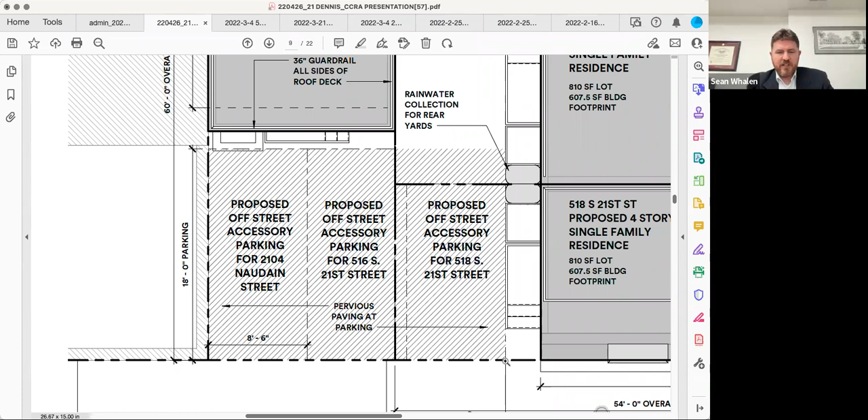So again, if this had been planned as a planned unit development, sort of a condo of the land if you would, all of these parking refusals would go away, but it was decided that we would keep these individual properties as separate, and that this parking will be addressed and set forth in a parking easement across the three properties to be recorded against the properties at that time. So with that, I would turn it over to Lauren, and you can tell me where you want to start.

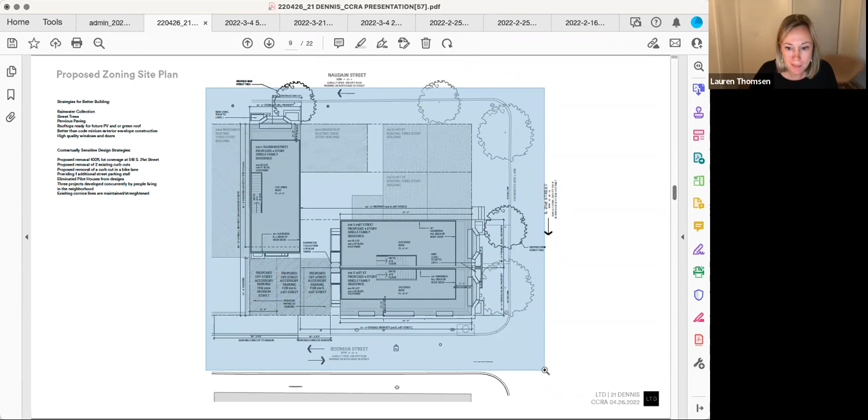I think here's a good place to start. So you can see we have 3 single-family residences. Sean, could you zoom in just a tad? That would be very helpful. They are all 3 proposed 4-story single-family residences with occupied roof decks.

And we are not seeking a variance for lot coverage, and our variance for height is minimal, considering what the by-right limit for RSA 5 is at 38 feet. We are doing a number of strategies to develop in a contextually sensitive way, which are evident on the site plan, and some of which Sean has mentioned before.

The first is we're removing the 100% lot coverage at 518 to the south, and we're proposing to replace that with a building that is equivalent of a by-right lot coverage, and taking a parking space, proposing a parking space for that. The parking we're proposing is pervious paving, and that would mean it would have less of an impact than regular paving on stormwater, and be better for stormwater management in that sense.

At 516, we have an existing curb cut that we propose to remove. This existing curb cut is going across a bike lane, which is obviously dangerous. And we propose to replace that with a new residence that will have off-street accessory parking in the rear between the off-street accessory parking for 2104 and the off-street accessory parking for 518 to the right.

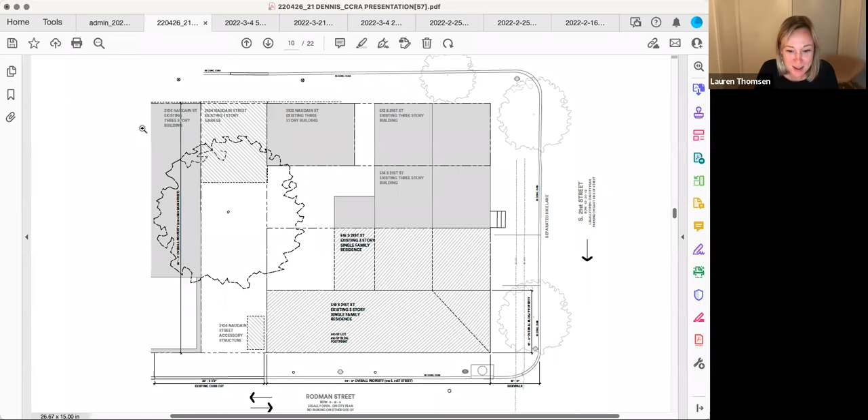And this is just an existing site plan showing the lot coverage.

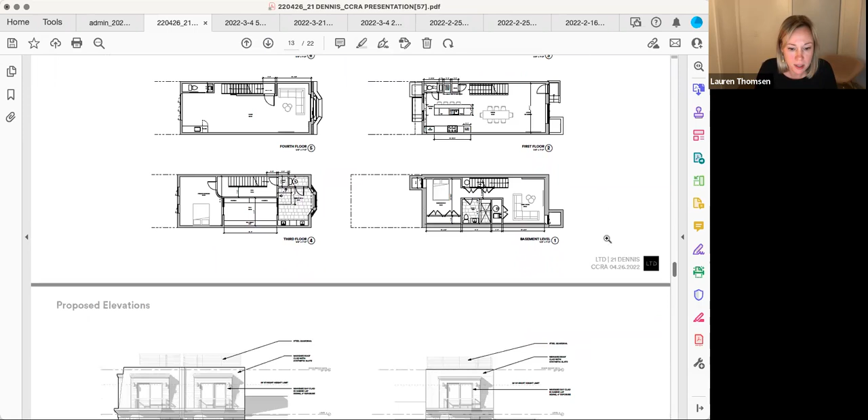Here are our floor plans, which are very similar for the 3 residences. Nuance changes at 516 and 518 were 15 feet wide, 41 feet deep, 41.6 deep. At 2104 were 16 feet wide and 41 feet 6 inches deep. Here we see the proposed building elevations.

We're proposing to use brick with a strong cornice, a bay window for added square footage because they are small lots. But we're not doing a square bay, we've angled the sides and clad the bays in brick. We're proposing simulated divided light mullions and casement and/or double hung windows with Hardie above the mansard.

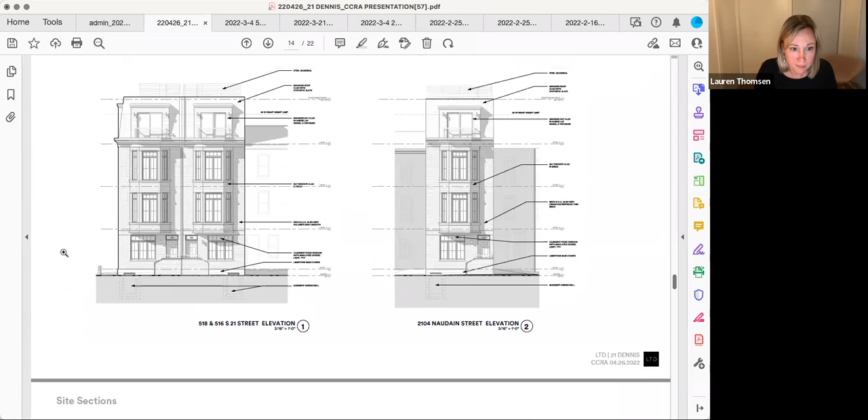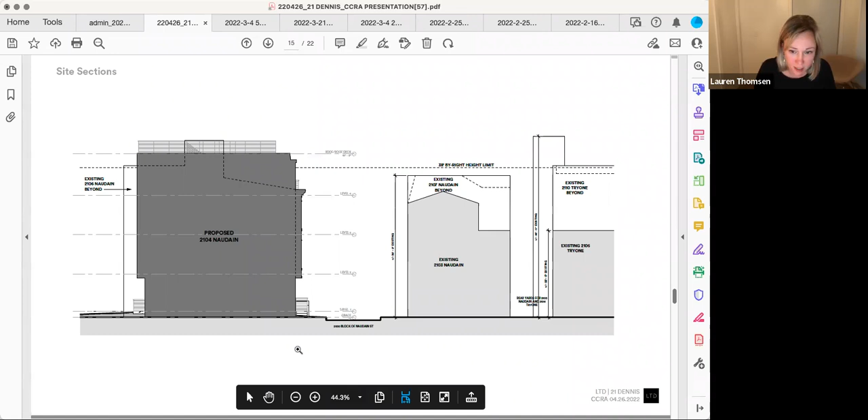We're showing site sections to demonstrate the impact of the height on the neighbors, and also the height as it relates to the existing context. Naudain Street has a number of buildings which are different in cornice line. So I'd say there isn't a strong cornice line on Naudain Street at this time, which we are highlighting on both the south and the north sides of the blocks. Next slide.

Cutting through 21st Street, we can see that there are buildings that are tall in the immediate adjacent context, which is 511 South 21st, kitty corner to the site to the north.

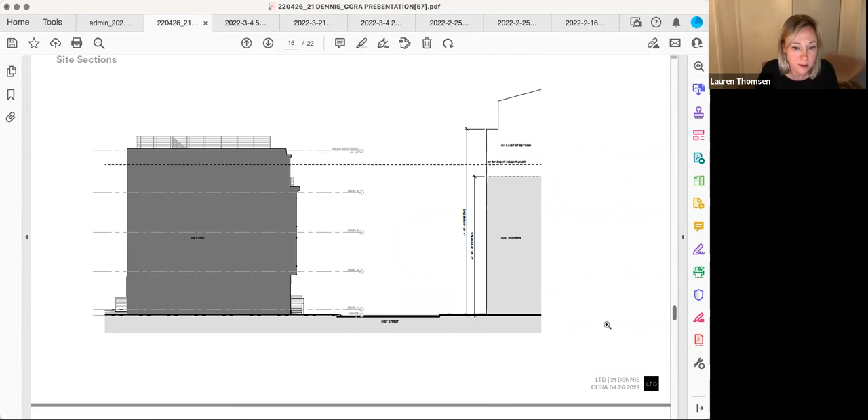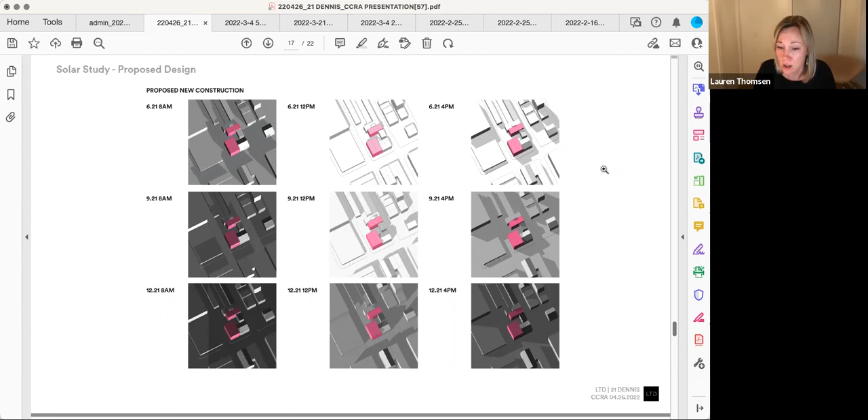We've done a solar study of the proposed new construction, so we can see the shadows that the buildings will cast at the summer solstice, the equinox, and also the winter solstice when you have the least light. So this is the proposed design at 8 a.m., 12 p.m., and 4 p.m. as the sun tracks around. South would be to the bottom left of all of the images. If you want to go to the next.

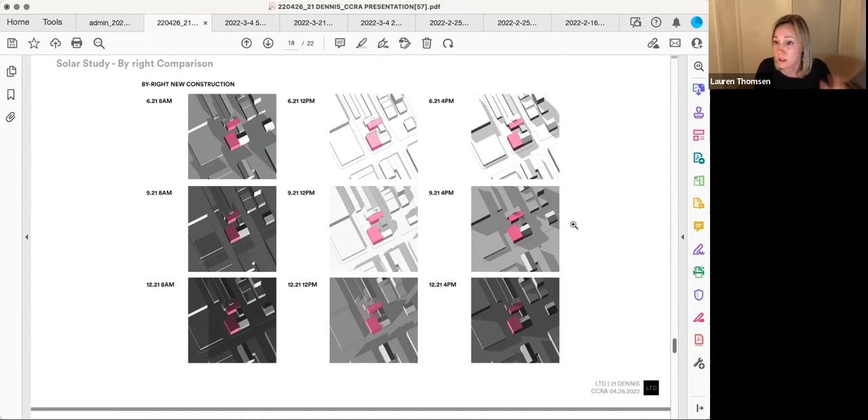We've also done a by-right comparison, as we're only 3.5 feet different, which in fact could be a solid guardrail or parapet. So what we're proposing is an open guardrail that won't effectively impact the light as much. Another strategy we're using is the removal of the pilot houses from these roof decks to eliminate that additional mass on the top of the buildings.

And then if you go one more slide down, Sean, here is a side-by-side comparison, and you can see that there's really very little effective difference in terms of the solar impact.

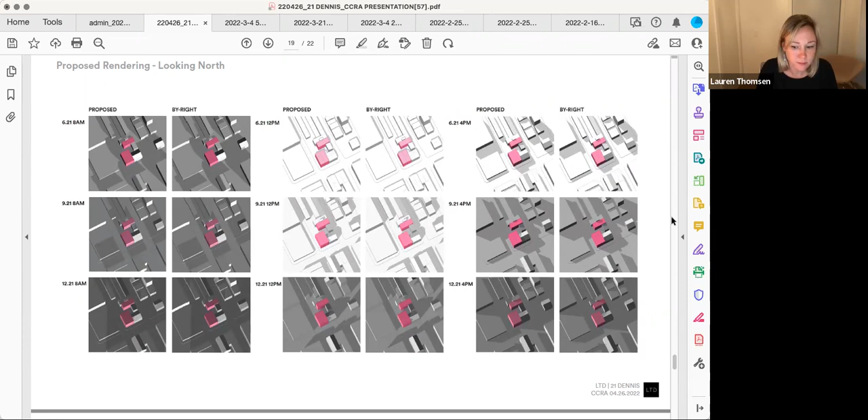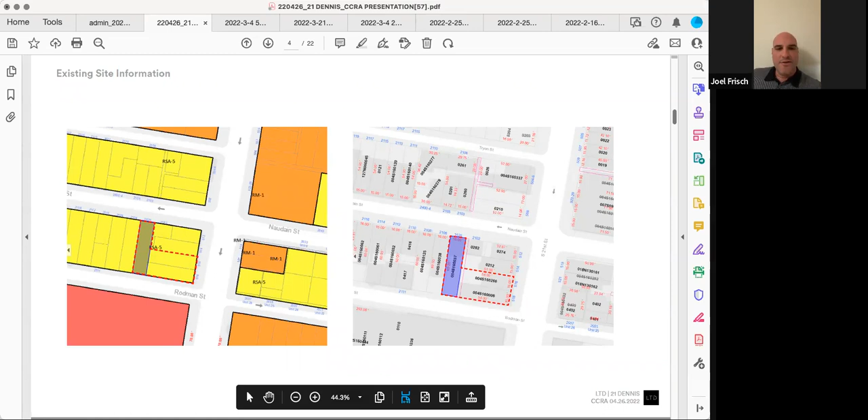Sure, good evening everyone. I'm Joel, live around the corner on Croskey Street. Super excited to be continuing to develop in our neighborhood. So in addition to sending out letters to everyone in the neighborhood, we certainly went around with our kids, who you see here on the Zoom, knocking on everyone's door. Had an opportunity to speak to a few of the neighbors. Always concerned with the unknown and what's to come with change. I think in general, many of the conversations have been supportive of continuing to improve the neighborhood. Certainly some questions around impact, but I know some of the neighbors are incredibly supportive. Some have expressed concerns about general construction in the neighborhood, and appreciate that there's a couple projects going on in the area. As local neighbors, we're willing to continue to hear any questions and needs of the neighbors and see how we can make this project work for everyone.

Terrific, all right, I have no further questions. Thank you. Okay, thank you, Bob.

Moving down our list, next Evan Litvin, any questions? Yeah, what material are you intending to use on the fourth floor, on the party walls, the exposed party walls? For the party walls, we were thinking it would probably be a cementitious panel, a lap siding. Okay, that's my only question.

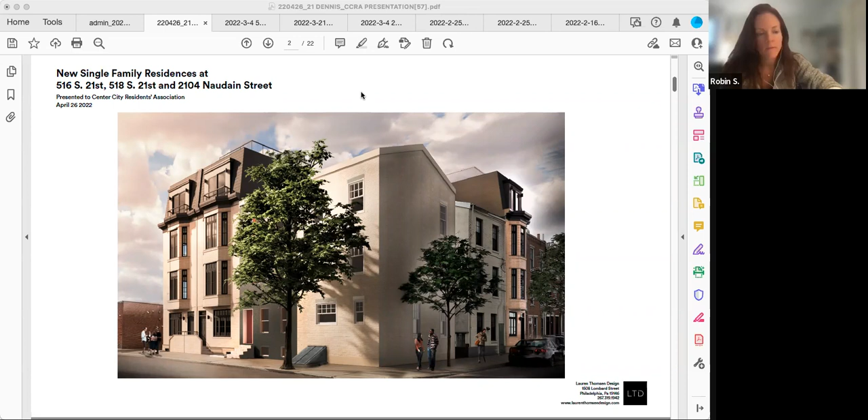Robin, any questions? No questions. All right, and Charles Robbins, any questions? My questions were addressed. I'd just like to state that I like the removal of the curb cuts off of 21st Street and Naudain.

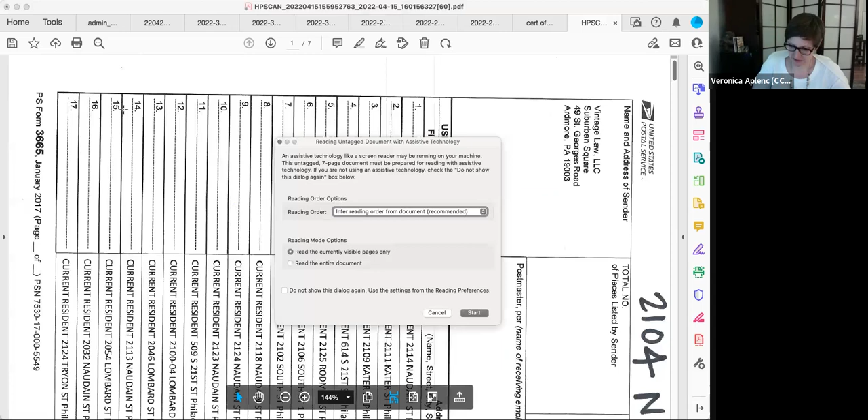Okay, and thank you. And I see that you're screen sharing the certified mailings that demonstrate that you actually put those in the mail. Yes.

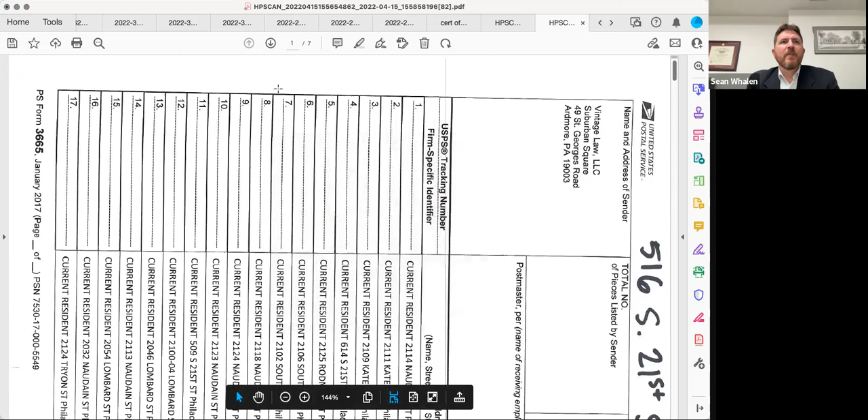So just to be clear, because we are presenting them together, I'm bringing up three since we have three separate properties here. What we did is we took the address list for each of the three properties, understanding that each property may touch a slightly different number of properties, and we combined them all together. That way you weren't getting one house that might get Naudain and 516 South 21st, but not 518 South 21st. So we sent all the materials for each of the three addresses to every address touched by any of the three properties. Okay, thank you, thanks for that clarification.

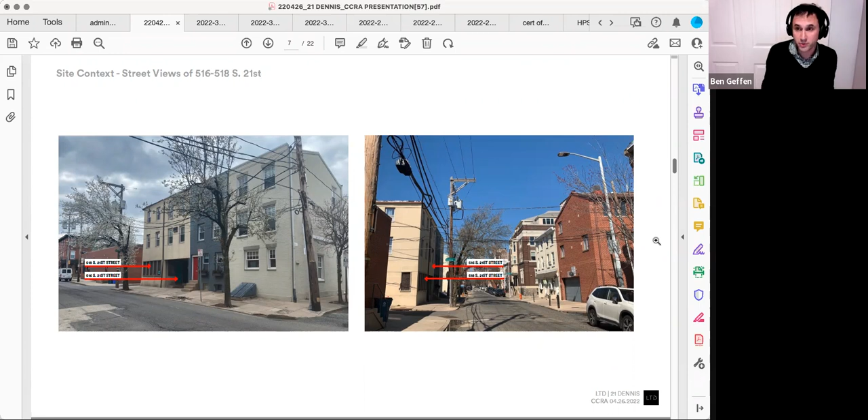We've routinely had problems when there is work being done in the near neighborhood. There's not a lot of on-street parking, and contractors just love parking their truck right in front of the garage door, which causes a lot of problems. It can cause backups of several cars, both coming out of the garage and coming down 21st Street attempting to get into the garage. So my question is, can you provide assurances that the contractor and the subs on site will be told not to leave their cars in front of the garage door? And if they do, who can people in the garage contact to make sure the truck is immediately moved?

Excellent points, and certainly something I should have raised already. First and foremost, both Joel and Rebecca and John Adler all live in the neighborhood, and they have a long-term relationship with the contractor, so there will be a lot of communication. They'll be walking immediately past this site every single day, at least once themselves, let alone multiple times, so they'll be immediately present.

And I will personally volunteer John Adler to share his information with everybody, to contact him directly if you don't get anybody, and you can always reach out to me. I just put my full contact information in the chat. I assume it hasn't gone away yet, and I will always reach out to the clients immediately.

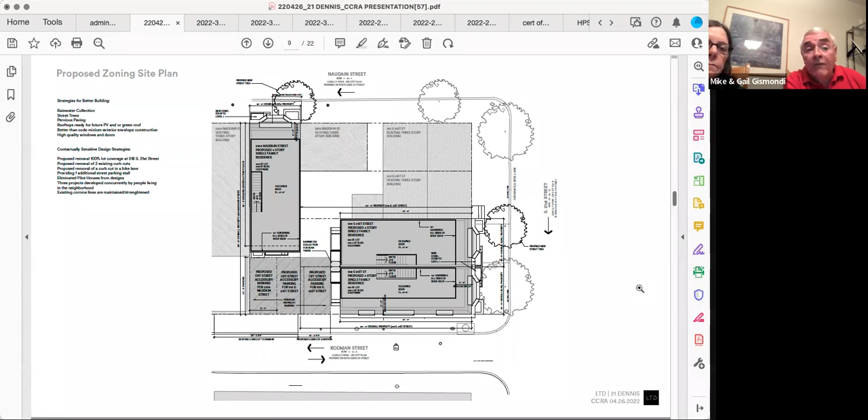Can you please unmute yourselves and pronounce your name for us, and also give us your address and share your thoughts? Mike and Gail Gismondi, 2106 Naudain Street. I'm delighted that they're finally going to build something at 2104 Naudain, but I want to follow up on the parking situation. I have off-street parking behind my house, which is adjacent to the lot at 2104. I'm in and out of my parking spot several times a day, a lot of those times are for medical appointments.

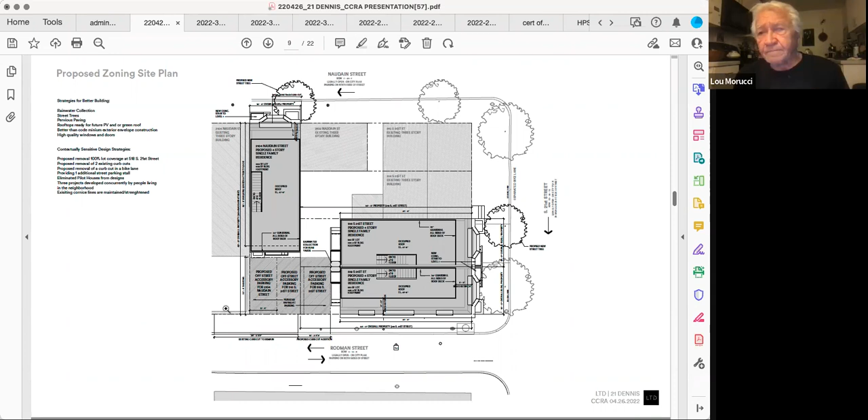I need space directly behind 2104, either to pull my car out or for room to back my car in. I'll go out 21st Street, I don't have a problem with that, but if I come back in, I need space here to be able to back into my parking spot. Either that, or I have to back down Rodman Street to get out of my parking spot.

So a couple of points, and again, certainly understood. We will never block off the rear of your parking. You will always have access.

It's not the rear of my parking. Anything on the sidewalk directly behind 2104, I can't get out and go east, and I don't have room to come in and back into my parking spot. That sidewalk has to be kept open if it's at all possible.

Right, and certainly understood, that's what I was going to say. We'll be keeping open this whole area to give you a turning radius. In the event there's a situation that needs to block this area for any reason, we don't foresee one, but we will reach out to you ahead of time to make sure it doesn't conflict with a necessary ingress or egress on your behalf.

All right, I have a number of questions. We were handed on 8.5 by 11 paper the plans, and quite frankly, I can't read them. I'm just curious, what is the depth of the property proposed for 2104, the actual building?

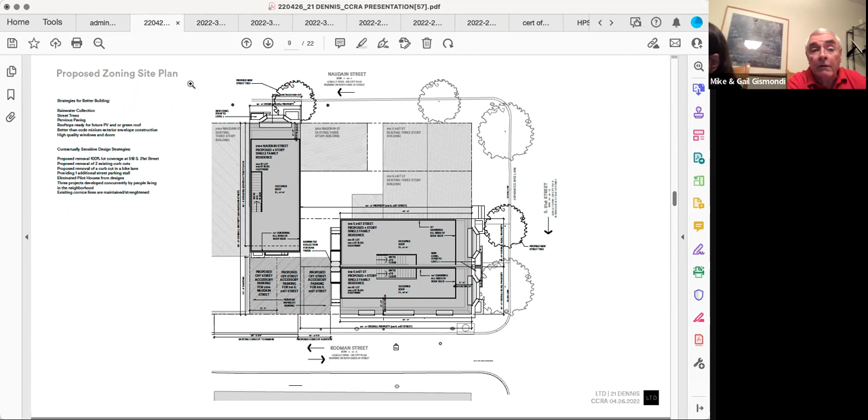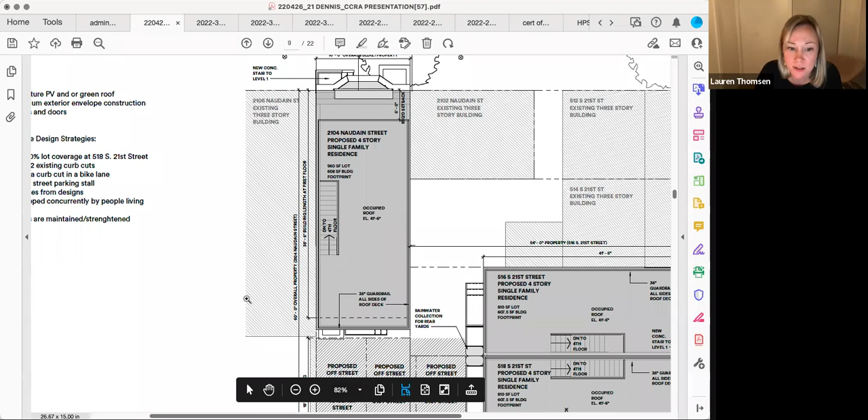It's 41 feet 6 inches. Okay, I don't think so, Lauren. I think that one's the small one, I think that one's 38.6. I think we went to 41.6 on the upper levels. Yep, you're right, correct. And then we went down to 38.6 at the ground, at first floor, which is the same as the other two buildings.

And Mr. Gismondi, if you see here, it is actually not proposed to be as deep as your existing home. Correct. Okay, no, I don't have a problem with it, it's a half a foot shorter than ours.

That's fine. And I do apologize if for any reason anybody on this call wants better plans and larger printout plans, I'm absolutely happy to provide them. It just gets unwieldy when we're sending out things in USPS mail. So if you want more full plans, please reach out to me directly and I'll make sure you get those.

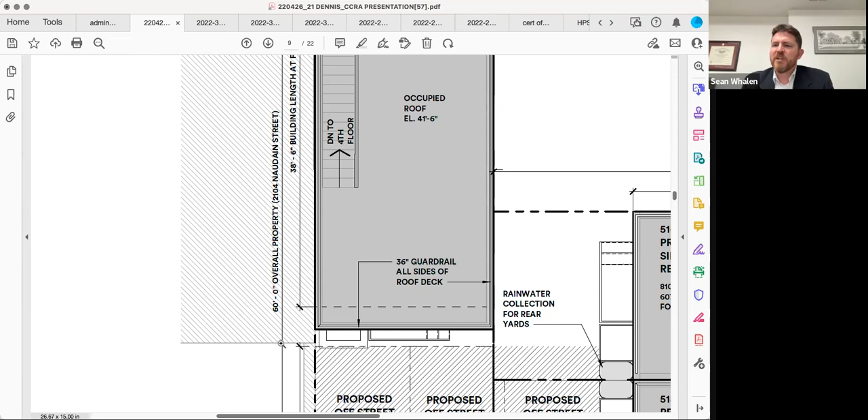Okay, and also on the plans, is there a window well for the basement in the front of the house and the back of the house?

Lauren, that's got to be you. Muted. At this time, we are showing that

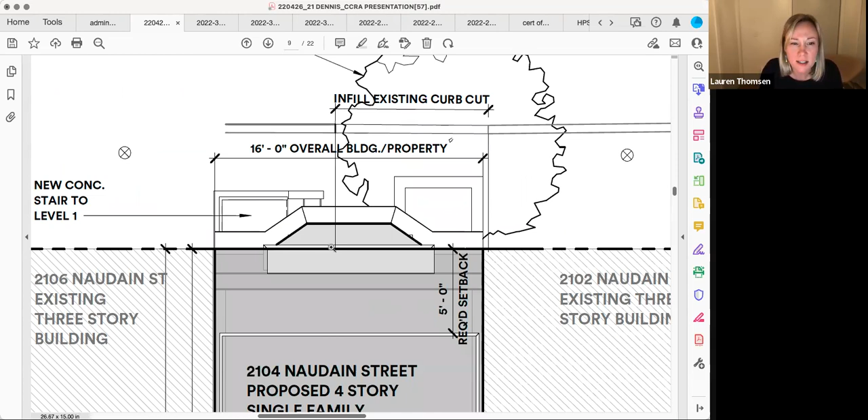Sean, do you mind flipping to the floor plans? Oh sure, that might show it more clearly. Maybe I could zoom out first so I don't kill everybody. Thanks, here we go, there we go.

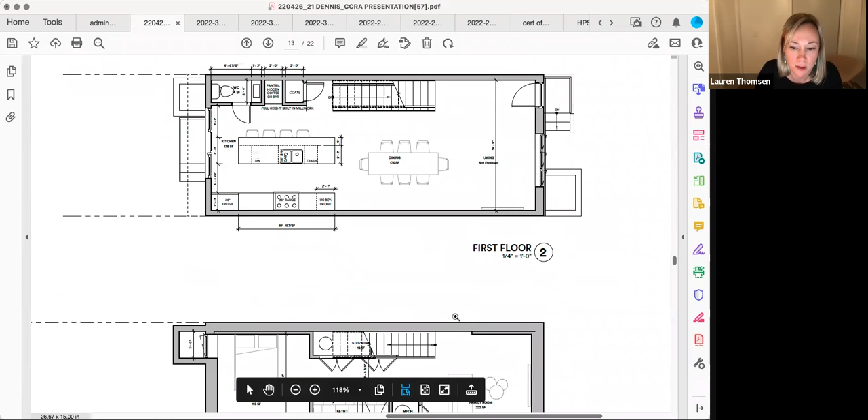You want to look at, we are showing two wells. We're required to have an egress well. Sean, if you don't mind, just scroll down and show the lower level, the basement level. So we're just showing two wells so that we can get two aspects of light into that level and really just make it usable.

Is that level entirely underground? Aside from 18 inches, yes. I'm sorry, what? Our first floor level, we are starting at 18 inches above grade. And so this basement level floor is 18 inches above grade and the remainder is below grade.

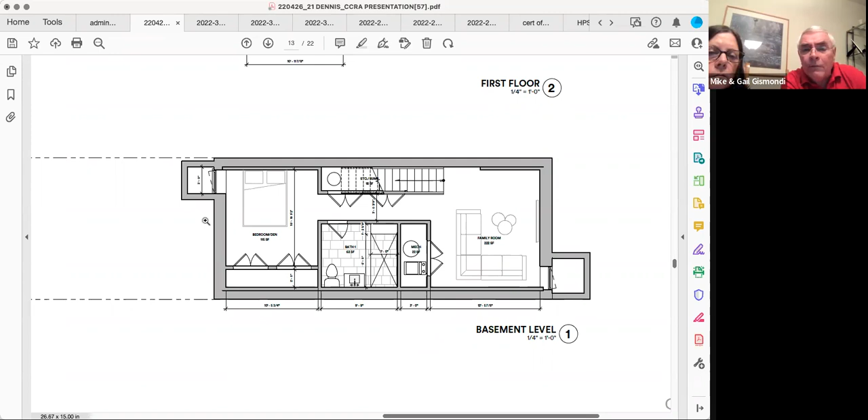Okay, so the renderings you have for the basement, it appears as though you're putting bedrooms down there? Or a den, yes. Okay, and going further up, the front of the house have these bay window type of things.

How wide are they on the second and third floor? I think they are 9 feet 8 inches wide. Okay, they're about almost 10 feet wide.

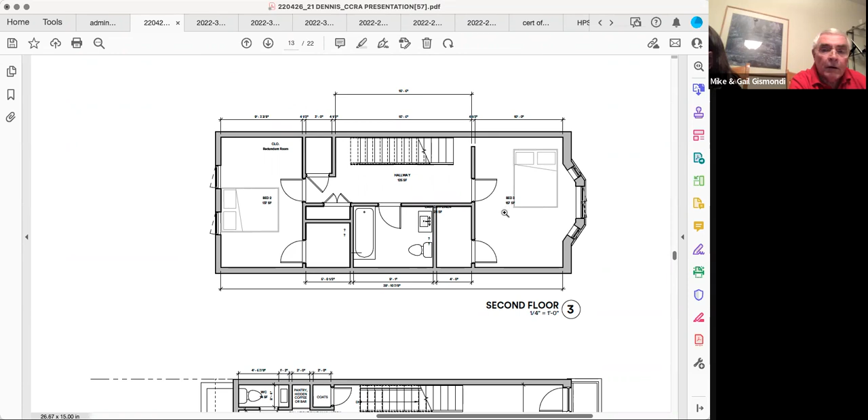And then how high? Sean, do you mind flipping to the elevation? I should say at their widest part, they are 5 feet wide, I believe. I'll have to verify that, but they cant back so as to minimize the visual impact and the site impact of them.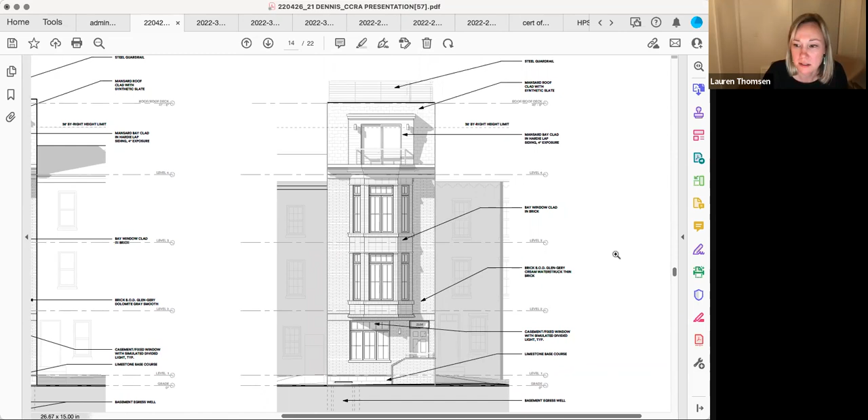And in this, wait a second, hold on. In the center, how far out do they extend? They extend 18 inches, and that's on both the second and third floor. Correct. Then on the fourth level, there appears to be a balcony there.

It's what we call a Juliet balcony. So it appears to be a balcony. Correct. Fine. How far out does that extend?

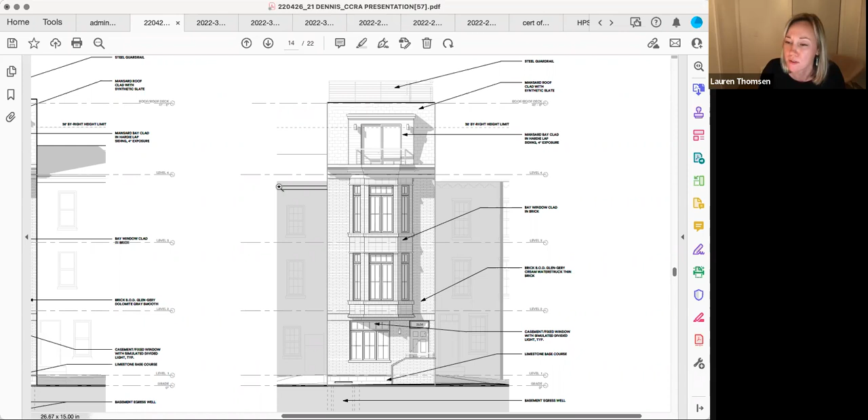That is inset from the front of the bay, so it doesn't extend beyond the front of the bay. Well, how far is that? Let's see if we can pull this up. That it's effectively flush with the front facade of the building. Oh, I apologize, technical difficulties. It doesn't look like that - it looks like it extends out over the second floor.

I think that's because of the mansard. So it's extending beyond the mansard. Yeah, so just the view is you have this bay and then this mansard is actually angled back. So it's a little hard to see in this rendering, although unfortunately I don't have a better one. But right there where you have your thing, that's further out than the bay window below it.

This is the cornice line. No one will be occupying the cornice. Then why have it? It protects the facade below, and also it articulates that cornice line and makes the building look more finished.

So I've seen a lot of bay windows. I've never seen something put on top of a bay to protect it. I've never seen that. All right.

How far out does that cornice go? To this point? Yes, okay. The cornice itself projects 1 foot. 1 foot beyond the bay? Correct, so it's 2.5 feet from the wall. Correct, yes. And then it looks like, at least on the other drawing, there is a railing up there. Correct. The railing would be flush with the face of the building, not the bay.

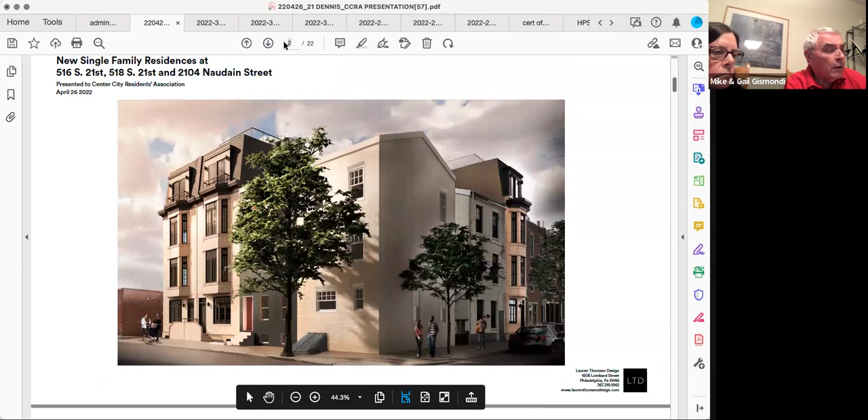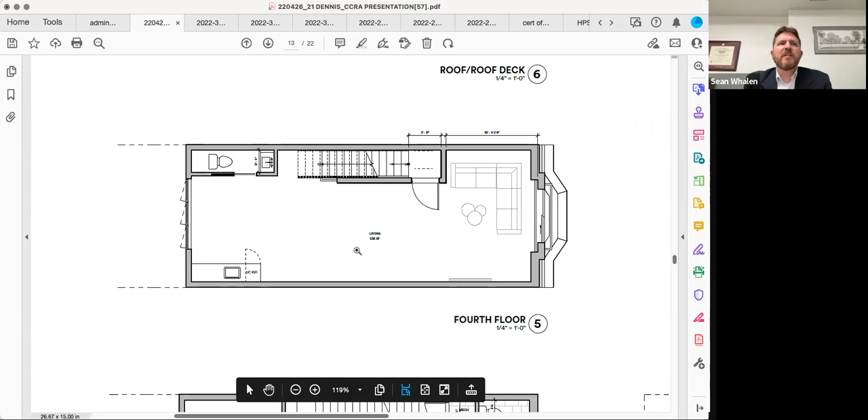Your fourth floor on the floor plans shows nothing. Is there a reason for that? That fourth floor space is actually sort of a build-to-suit space. So as people are building or purchasing the homes, this is meant to be kind of a flex space. A lot of people now are working from home, they may want an extra office, or they may want an extra bedroom. If you're silly like me and have 4 kids, you got to have as many bedrooms as possible and no office at home. So the intention is there would be a few non-structural walls that could easily be erected in this space to divide it up as appropriate for whoever the buyer is.

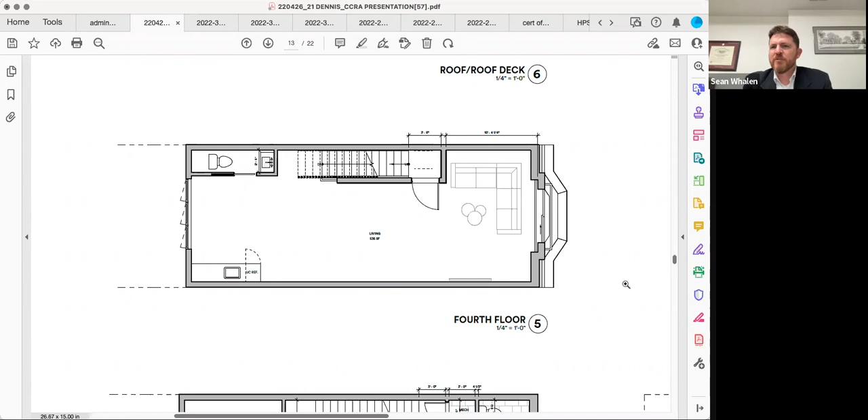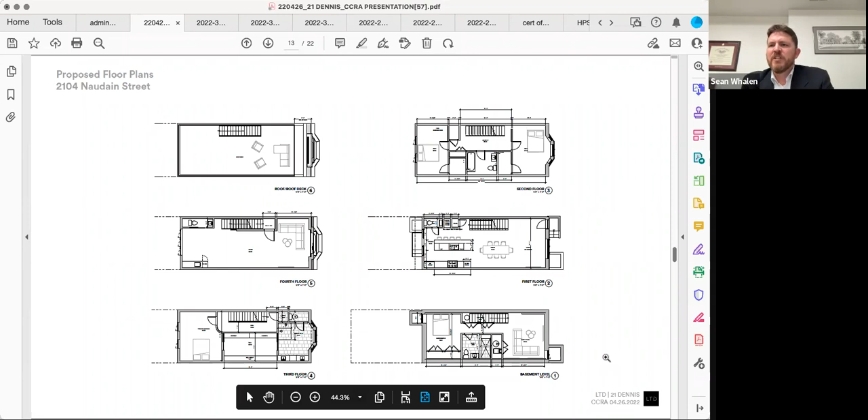So if I understand this correctly, the renderings you have for all the floors can be changed - they're not fixed in stone. Well, the walls - Lauren could walk you through which walls are structural or which are not. The structural walls could not be changed. I understand, but I don't see any structural walls. The other interior walls...

Excuse me if I can just step in for a moment as chair. Thank you for your concerns. I want to state that our meeting is focused on zoning issues. Okay, I think right now we're talking a little bit about design. I understand - let me talk zoning then with you.

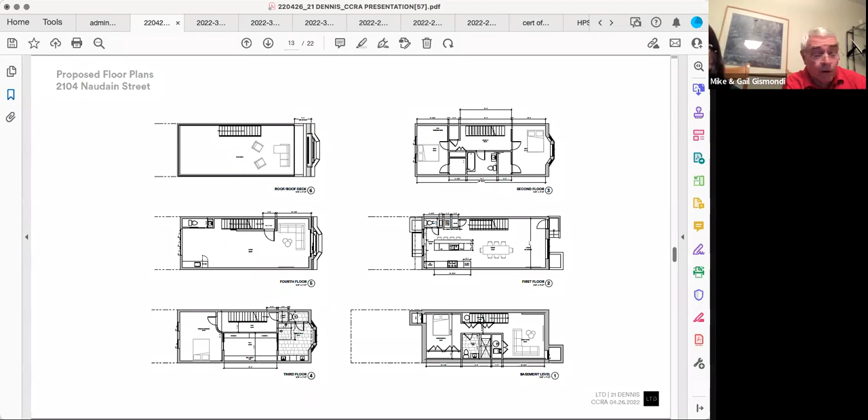There are 16 houses on the south side of Naudain Street. All of them have basically the same elevation, roughly 28 feet, a couple inches difference between them. You said that the elevation of this house is 41.5 feet, but you didn't include the railing. The railing, I believe, is 42 inches - am I correct? Correct. That brings the elevation to 45 feet, not 41.5.

So just to be clear, it's a very good point. Sean, let me interrupt you please - I'm a member of the committee. These are not zoning questions, these are just further arguing with the developer, which you're entitled to do in another forum, Mr. Gismondi. But the committee has got to hear from many people, and we have to make a decision. So I gather we have that.

Concern about the height of the building. We have the height of that building blocking my whole deck - I can't see any. So assert your position and let's move on.

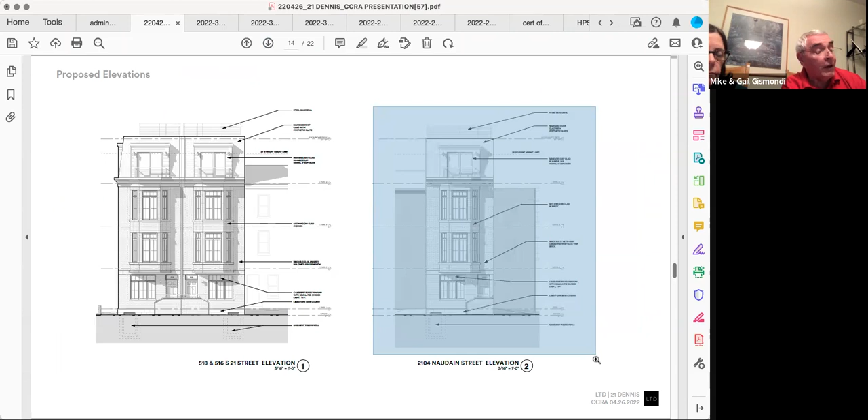Fine. At that height, the front of their house at 45 feet is 17 feet higher than my house. We have a pitched roof - the height of the pitched roof is 32 feet high. At 32 feet, you're 13 feet above my house. Our pilot house is 36 feet, you're 9 feet above the top of my pilot house, and you're 17 feet above my deck at the back. This is enormous - this is bigger than anything on the street.

That one example you gave of the house across the street, I can tell you is wrong. This house is too big for this street. There are a lot of Trinity houses on the block, a lot of houses with 30-foot lots and smaller than that. This is way out of line for this particular street. You took the drawings from 21st Street and put them onto our street, without considering what our street is like. This is wrong. I urge you to vote no on this proposal.

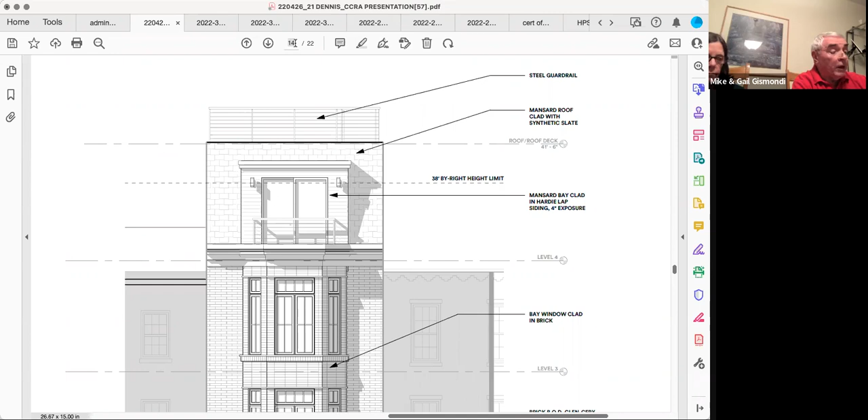I just have one fast comment and I'm done. Joel Frisch said that he spoke to us. He did. The last thing I said to him when he walked out of the house was, I wish you weren't putting a 4th story on that place.

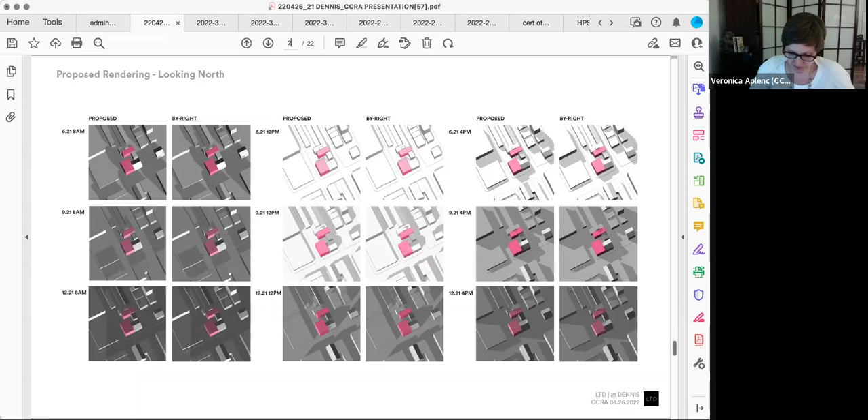Sure, it's Guston, and I live at 2129 Tryon Street, which seems like it's a little ways away from this building site. But my question is about the source of electrical power. The reason for this is there have been a number of expansions in our neighborhood. I'm the last house on our power line, this is according to PECO, and I now have strobing lights most of the time. So I don't know whether the source of power for these homes is coming from the same place that I get mine. If you look at the current street view, what I'm told by PECO is that up on one of those poles right near this site is where the electricity comes from for our surrounding neighborhood. So I'm just wondering whether you're having extra power brought in, or whether we have the same source. If I need to be asking this in a different forum, I'm happy to. But what I don't want right now is to have such limited power, because there are other large, enlarged properties going up in the immediate neighborhood. Can you give me some help with that?

Absolutely, and I'll be very quick, not to be dismissive, and happy to have this conversation with you offline since it affects you immediately. But essentially we're a little premature on where the power is coming from, because that has to be approved at the building permit stage.

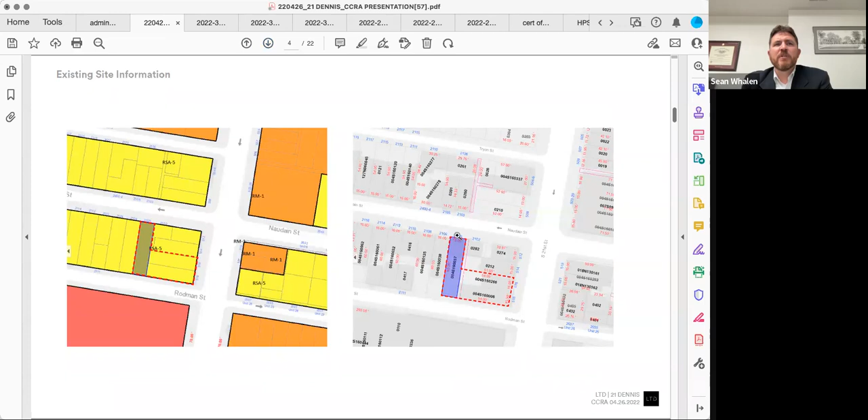Okay, so it's just open access. Correct. And when you're constructing, putting the trucks on Rodman, because obviously they can't go down Naudain, Rodman is a two-way street, how am I going to be able to access my home with my vehicle? So the western access to Rodman off of 22nd will always remain open. And so again, here's Naudain. But if there's a truck in the street, you can't get by. The street is as narrow as Naudain with no parking, but is a two-way street. So if there's trucks on the street on Rodman, a vehicle can't go.

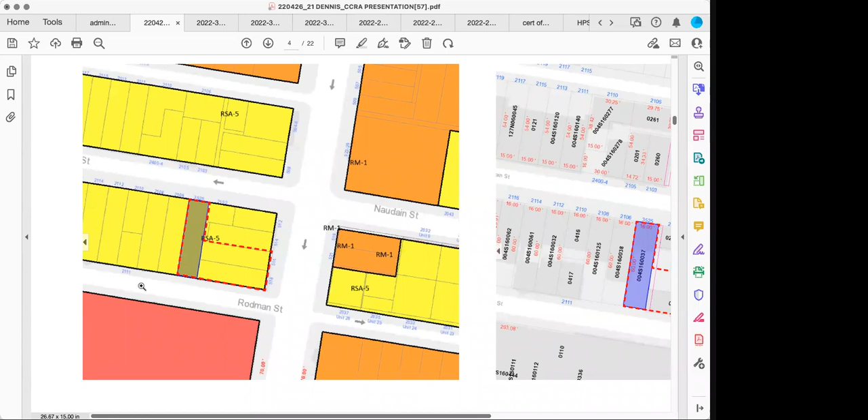So you're saying I have to back into the street and back off the street? No, actually, to finish my thought, because we have this whole back area, we are not parking any trucks on the street. They will drive down Rodman to access the rear of our properties, but then they will pull onto our properties and be able to stage there themselves so as not to block Rodman from traffic. Okay, I appreciate that clarification. Call me cynical, I'll believe it when I see it. I understand, we've all had the trouble with access.

Okay, yes, and to that point, again I think Mr. Geffen was the one at the very beginning. We will make sure that everyone and anyone who wants it can have a direct phone number or email for anyone, including myself or from the development team, to make sure that if you do have an issue, it can be remedied as quickly as possible. Okay, thank you. Okay, thank you.

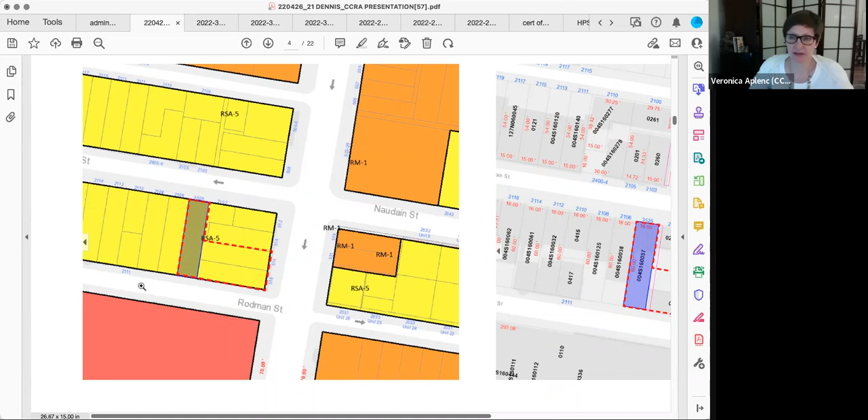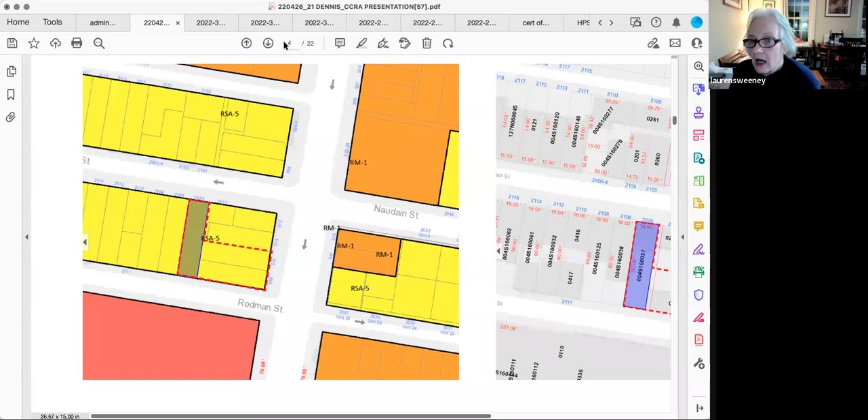Lauren Sweeney, please tell us also your address. Can you hear me now? Yes, we can hear you. Okay, 2102 Naudain. So I'm to the east of the proposed house on Naudain. And I have a number of concerns, but I will start with just saying that I also am very concerned about the height of this building because I live closer to the corner. The light isn't going to be as affected in my house. Also, I don't have any windows on the back.

But the design just seems, again, I'm another person who finds the design to be out of place, and the extra height is just really jarring to look at for me.

The safety concern I have that I'm going to bring up now, because this has really been alarming me since I got this information: my house on the side of the 2104 property has a covered alley running from front to back. My basement does not go under that covered alley. So when they start digging down into the ground, I don't really know what is below my alley. I'm just really worried about the integrity of my house as they start digging a basement, and I wanted everybody to be alert to that. But I also, that would happen regardless of the design of the house, so that's not really a zoning issue.

So just quickly, if I may, and I know it's not a zoning issue, but it's of utmost importance to everyone. One of the seminal issues in construction in the city right now, everywhere, is the structural stability of adjacent homes. Everyone has seen danger in what you're describing, Ms. Sweeney, of not knowing what's under the ground there. When we perform the demolition and excavation for these three homes, we're required to do what's called special inspections. We have to have a certified third-party engineer, on top of anyone from L&I who would be coming out daily, on site at all times, the entire time that work is being done, to certify that we are doing the work correctly, that there is no damage being done to your home, and that everything can proceed safely.

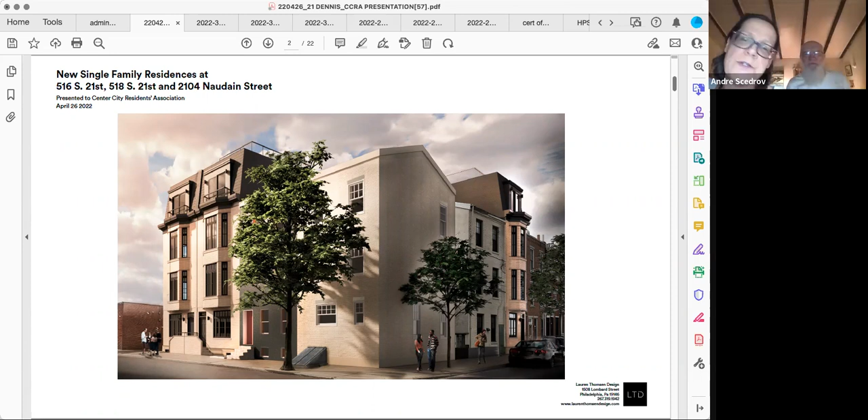Hi, this is Bonnie Hoke Scedrov, my husband Andre Scedrov. We're at 2130 Naudain Street, and I just want to register that I'm opposed to this. One of the reasons I'm opposed to it is that I think it violates the quasi-colonial charm of our house and our whole street. I know we're pretty far away from the light issue, but it will certainly affect us even down at 2130 Naudain.

I go back far enough that I remember when there was a huge fight in Philadelphia about the Rouse Towers going higher than Billy Penn's hat, and everybody said let's get over that, let's move on and live in the modern age. They built them, and it isn't bad, but it's in a carefully zoned area in the center of the city where people don't live. One of the things that attracted us the most to Philadelphia when we moved here some 40 years ago is the fact that it's so livable. And of all the streets around, our block in particular is one of the most livable and charming.

Each house, though it's not a historical district, our house is 170 years old. It has a colonial flair to it, and all of them do, most of them. There's a kind of sameness in charm to the houses. They're smallish, and that's good, because it means there's more light and air and everything. I agree with other people who have complained about this, that this thing is way too tall.

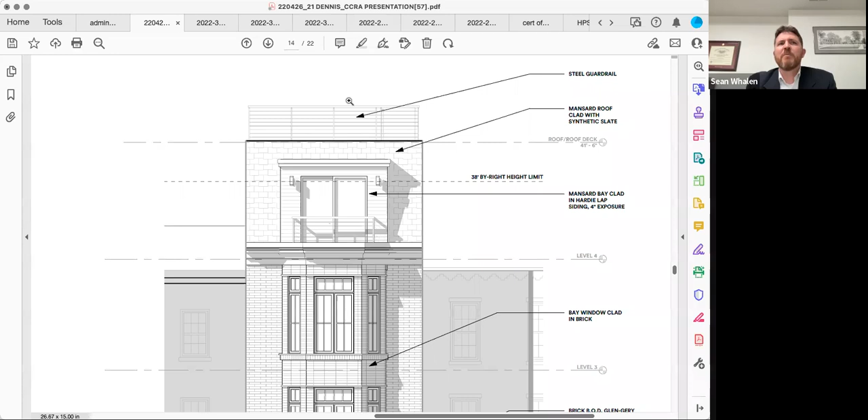And so, yes, the height will be, no matter what, at least 38 feet, and that's by right under the code. If we built to this height, the top of this wall would come down here. On top of that would be a 3.5-foot parapet wall, which we are not showing here, we're just showing the top of the roof. And then on top of that setback, this guardrail will not be visible to any pedestrian, it's set back by code and required from the front of the building line. So this height would not be visible to anyone, it would just be this height right here.

And that is absolutely correct, Mr. Albert, thank you for the clarification. All right, any other questions, Wade or Claire? That's it, thank you. Thank you.

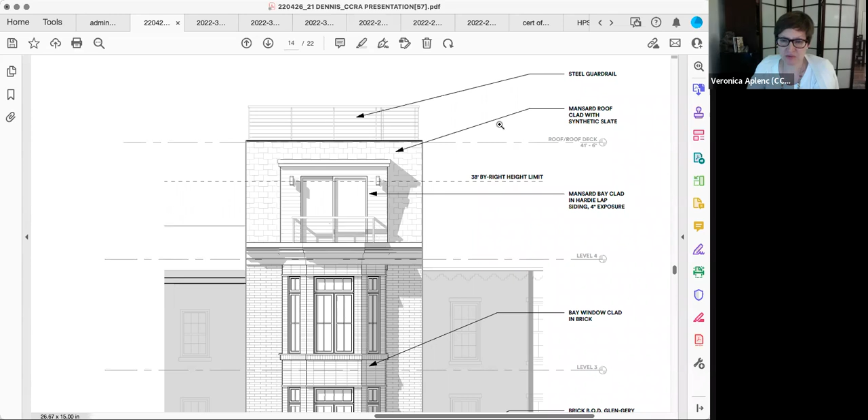Apologies for any mispronunciation. Can you unmute and give us your address and ask your questions or share your concerns? Hi everyone, my name is Tanishka. My wife Pankri and I just moved to 2100 Naudain Street, so we're right on that corner, right next to Lauren, pretty much in all the visuals, that house featured right in the center. Nothing new to add, but first of all, thank you to the folks that put this together, very thorough.

I just want to echo similar concerns about the height. To be a broken record, I think it's a significant difference to add that height. My wife and I live on the corner, so we benefit from a lot of that space and extra light, and the difference between our second and third floor light is substantial. So I'm very, very concerned for the rest of the neighborhood with that incremental height and how that's going to impact them.

It's going to have less impact on us, but I'm very concerned for the rest of the neighborhood in terms of the impact that extra floor will have. I'm speaking from our own experience in our house, the difference between second and third floor, even with that large of a gap between our neighbors on the east side.

Thank you very much. Thank you.

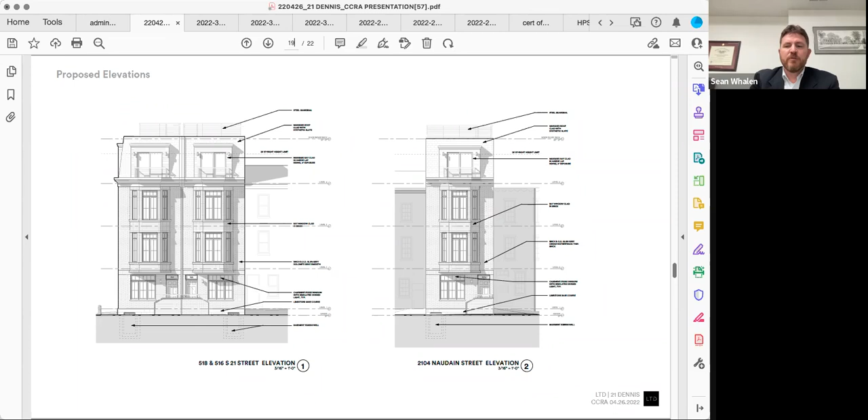So if I may just quickly, because I think this may truncate some of the comments, we're getting a lot of comments about height and light and air. I went to the wrong page, I'm sorry. I will go to the shade studies and focus on them some.

What we are seeing here is the proposed versus the by right. Essentially, because we've pulled away the pilot houses and tried to truncate the height as much as we could, there really is no discernible difference in light and air between the proposed and the by right.

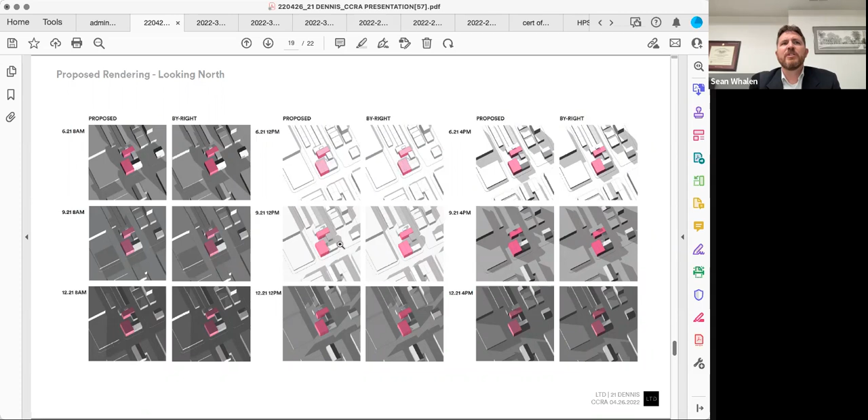You can look at each segment, and I'll take this center one for an example. Here you can see there's no added shade anywhere. Here you can see the shade line comes out across the street. It's exactly the same in the by right as it is in the proposed.

This one's a little dark, so it's hard to see, but I'm happy to give color renderings to anyone who wants to see these. Again, at a different time of year, you can see the shade study as it plays across.

There will never be any shade from any of these three homes at the corner, Mr. Bala. That's why I brought it up, just to show you at this point, the impact of these homes simply will never impact the home at the corner.

As you can see again, here's the shade line right there, and here's the shade line on a by right project. It's actually the pilot house that's reflecting and showing shade on the by right. So I don't want to belabor that point again. I'm happy to provide color drawings and renderings to anyone who wants them. But there will be, I can say unequivocally, no impact whatsoever from the proposed height versus the by right height.

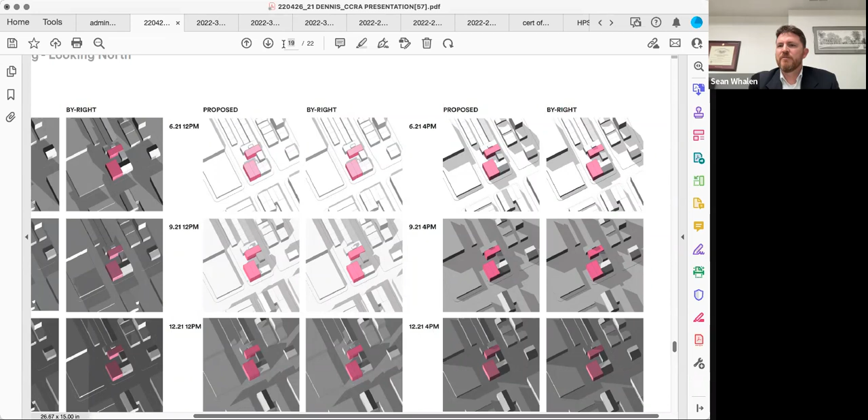And Sean, just to clarify, by right means what the owner of this property has the right to build based on the current zoning. Yeah, so just again, for the public who may not understand what by right means. No, I appreciate that, and I've been kind of speeding past that.

Each of these homes has a zoning district of RSA 5, meaning single family attached residential. Under the code, what I've been describing as by right, and I apologize for being glib about it, is that the code allows certain things. So the code says a height not to exceed 38 feet for what's a by right allowance. That's where that 38-foot number comes up.

And it's not particular to any block. So I certainly have heard the comments specific to this block, but it applies to all RSA 5 designated properties in the entire city. There's an allowed height of 38 feet. And that's what it means if it's by right.

So if we pulled this variance request in the proposed lots, which we're not intending to do, and came back with a by right use, we would not be before this group. We would not be describing or discussing any of the design or any of the aspects of the project. You would simply see construction start.

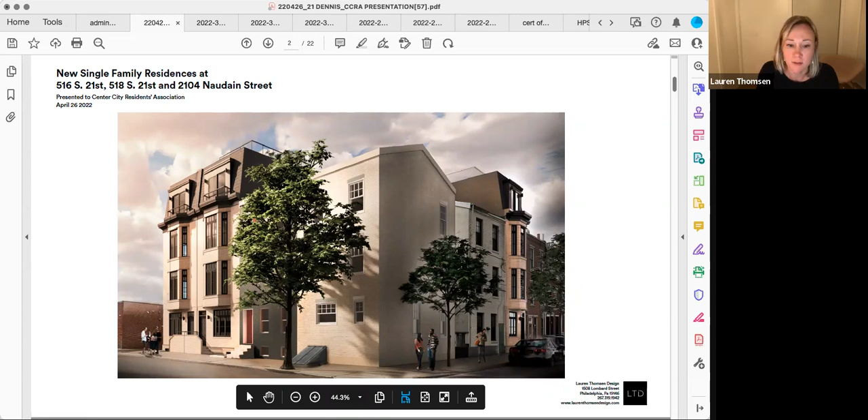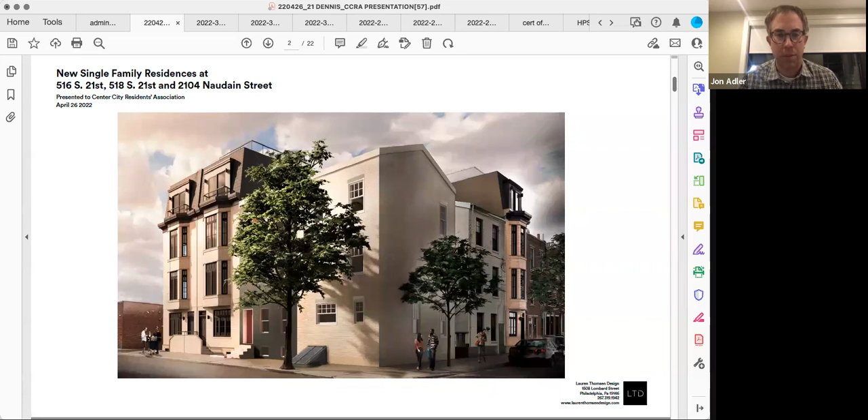I would also add that we would need to sink the first floor 3.5 feet to have a compliant height for these homes, which would necessitate essentially walking down steps inside the front door to get to the first floor of living space, and exacerbate the foundation issue to get us to be a compliant height.

Just one more thing, which I know Lauren pointed out in her design discussion, but it's most obvious here, I'll try to zoom in. This is the 21st Street homes, and it's the same condition on Naudain, but just more obvious here. We designed the project, Lauren designed the project, to try to match up the first floor of windows and doors, so that way you have that continuity that people have spoken about. The same condition exists on Naudain, with the attempt to maintain that general line up and down the block, and not have this kind of piano key design feature, which so many of us have seen on so many blocks. Here you do have just a few steps in to create that stoop feature, just like the house next door. Hey, thank you.

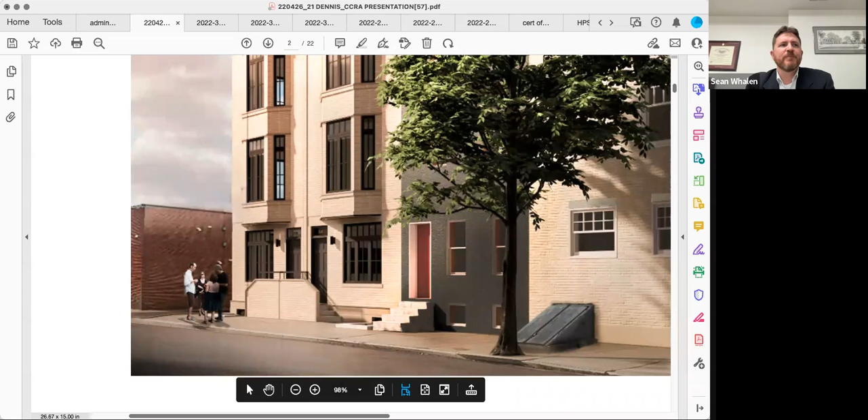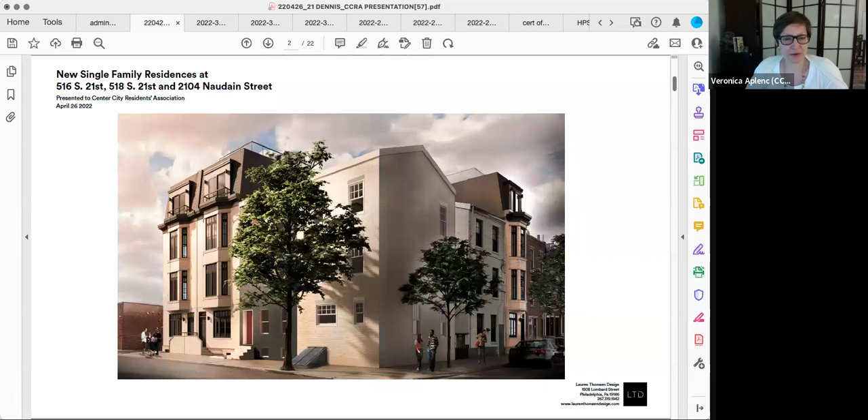Okay, now is there anyone on the call, any member of the public who has a completely new and completely different point that we have not yet heard? I doubt it, but I'm a big fan of democracy, so I'm going to ask.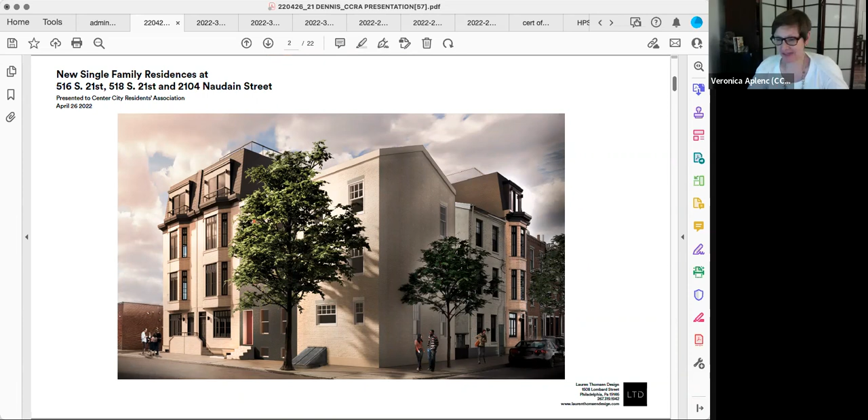All right, hearing nothing, I'm going to thank the members of the public for having come and having shared your points of view. I also want to thank the representatives of the project, Sean and Lauren and John and all the rest, the Fishers, for having come.